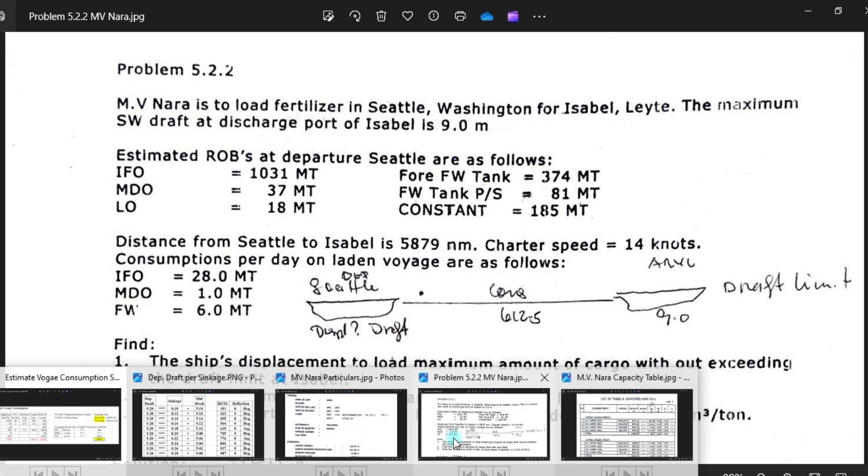The distance from Seattle to Isabel is 5,879 and the charter speed is 14 knots. So 5,879 divided by 14, which is the charter speed, you will get 421.21 hours, running hours. So with this 421.21 divided by 24 to get the number of steaming days is 17.55, which is here.

Steaming time is 17.5. So you have the steaming time, you have the consumption, so multiply 28 by 17.5 is 490. And 1 times 17.5 is 17.5, and 6 tons times 17.5 is 105. Total of 612.5, 612.5. So it is now confirmed.

Now, proceed to question: the ship's displacement to load maximum amount of cargo without exceeding the draft limit. So we will look at the displacement of saltwater upon arrival in Isabel. Find the maximum amount of cargo that she can load. So meaning, what is the maximum cargo to load?

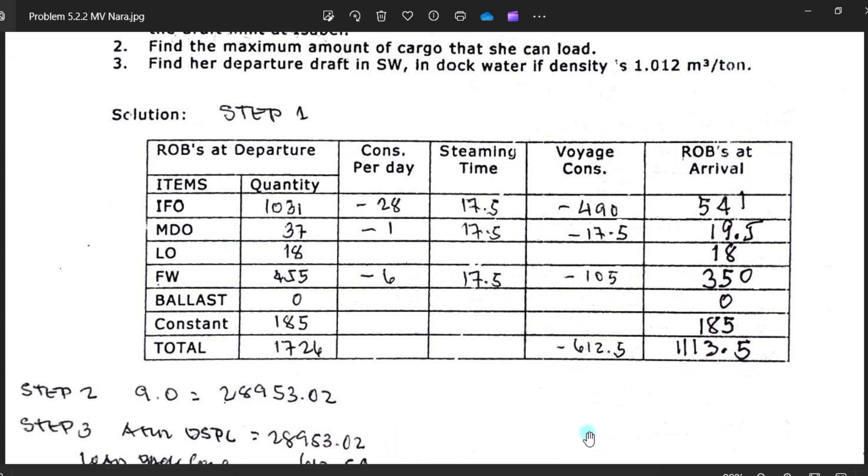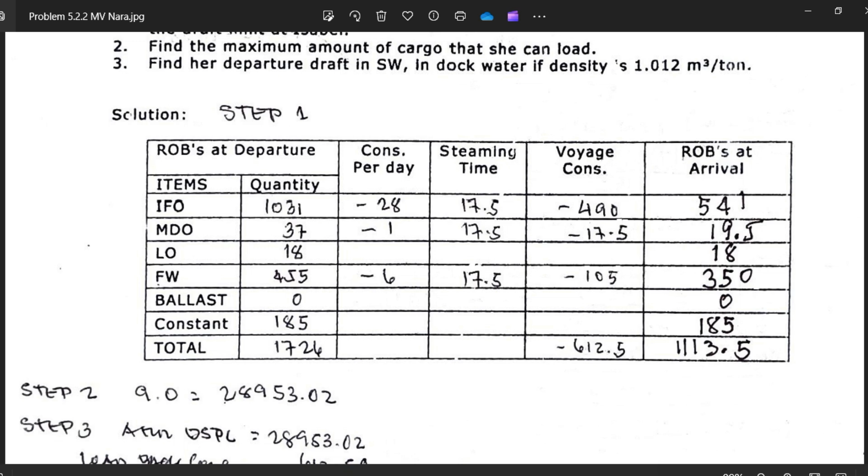So total quantity is 1726. I already showed you that one. 1726, and the total consumption is 612.5. ROB at arrival in Isabel is 1113.5. Okay, confirm.

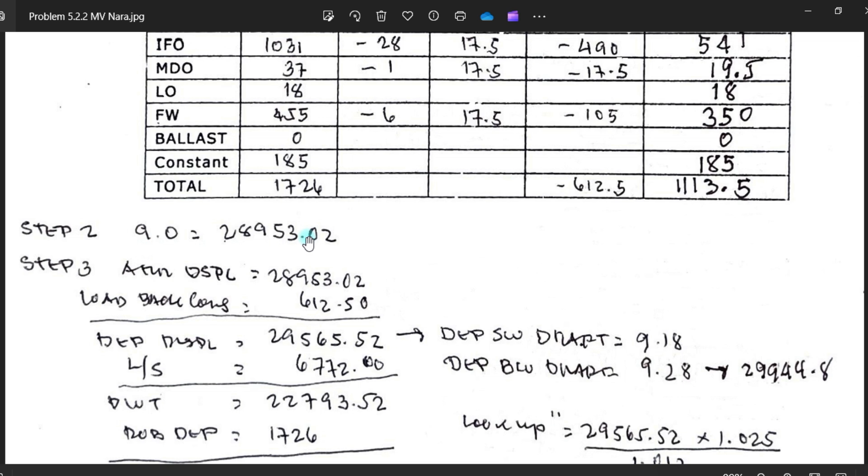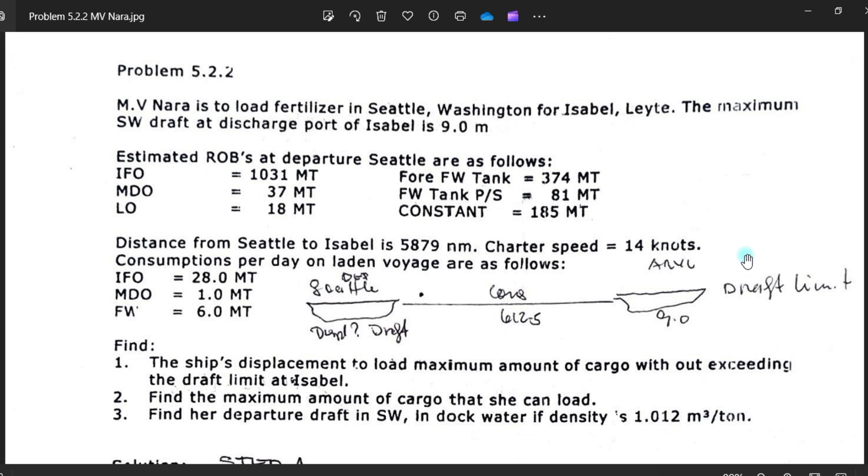Okay, next, step 2. What is the seawater displacement at 9 meters arrival in Isabel, of 9 meters? It says here 9 meters, discharge port of Isabel of 9 meters. So in saltwater, what is the displacement of saltwater of 9 meters in Isabel? So 9 meters is 28953.02.

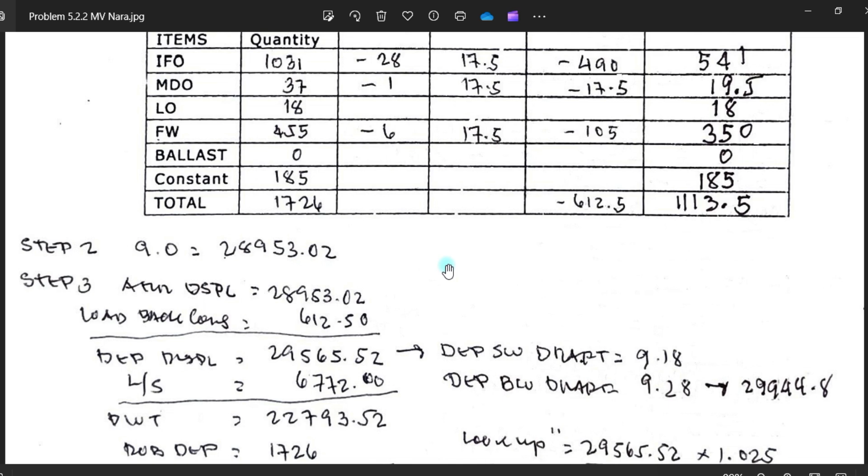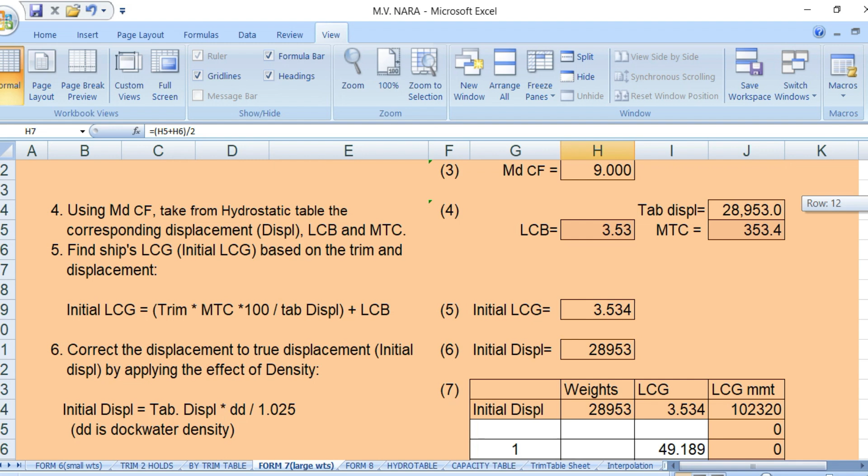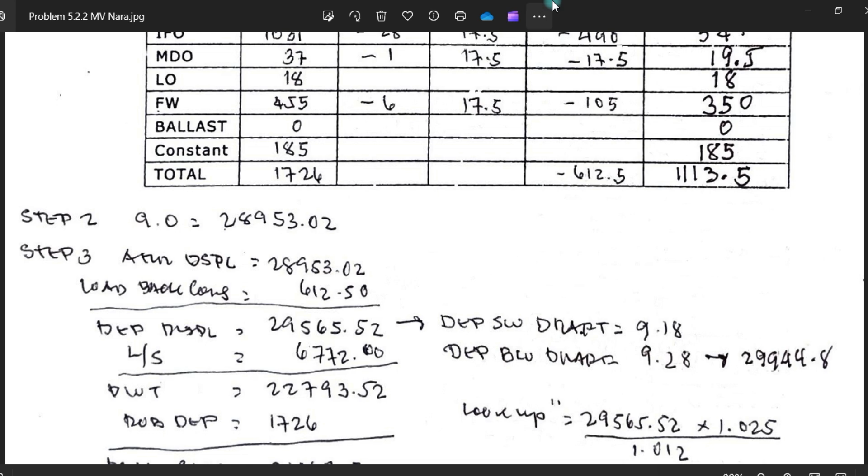So we go to the program, then with the saltwater 1.025, you put here upon arrival in Isabel of 9 meters. What will be his displacement in saltwater of 9 meters? His displacement is 28953, which is the displacement at this 9 meters.

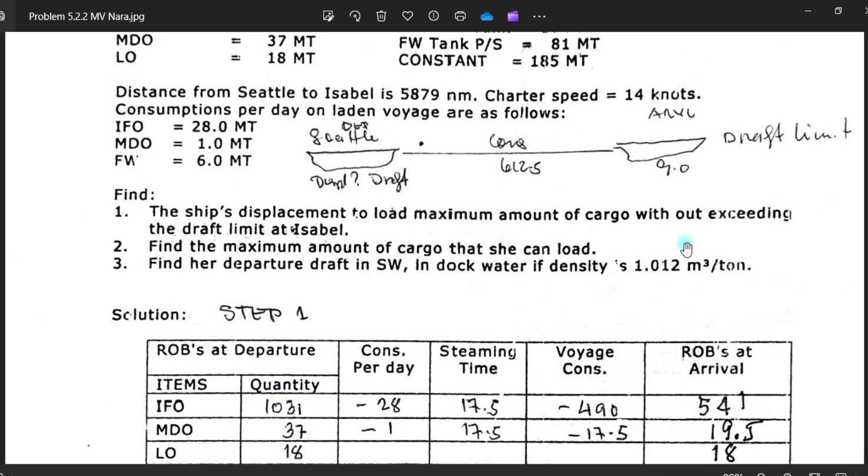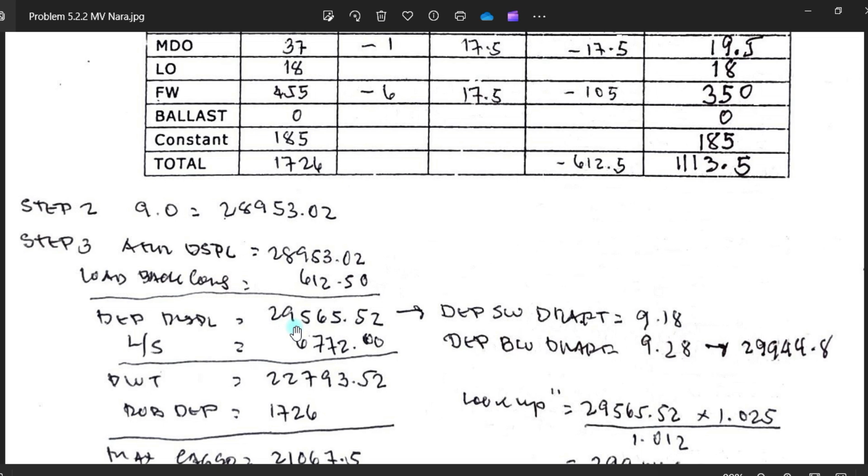So your arrival in Isabel is 9 meters. You have a consumption of 612.5 from Seattle to Isabel. So this figure of 612.5, you add to the displacement of your departure in Seattle, so you add the 612.5, so you will get a departure displacement of 29565.52. When you add 612.5 to the saltwater displacement of 9 meters, you will have a departure displacement of 29565.52.

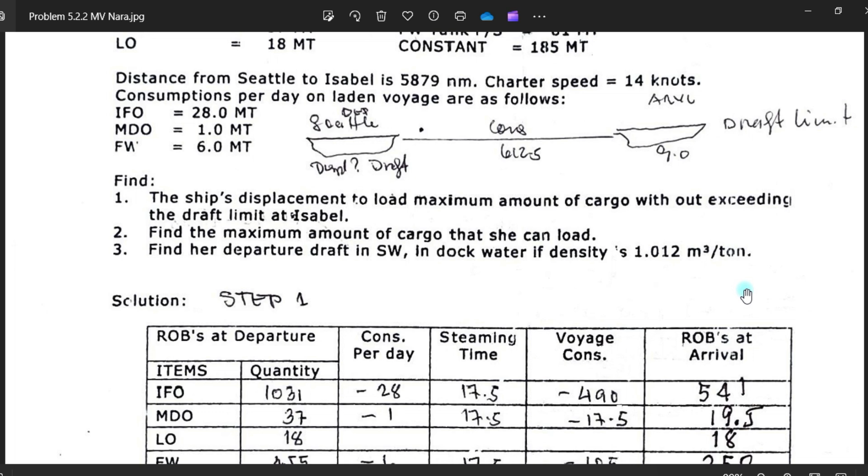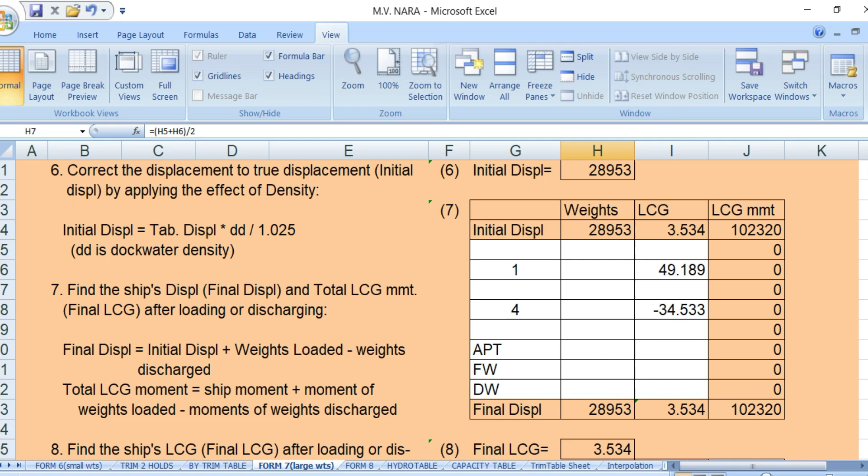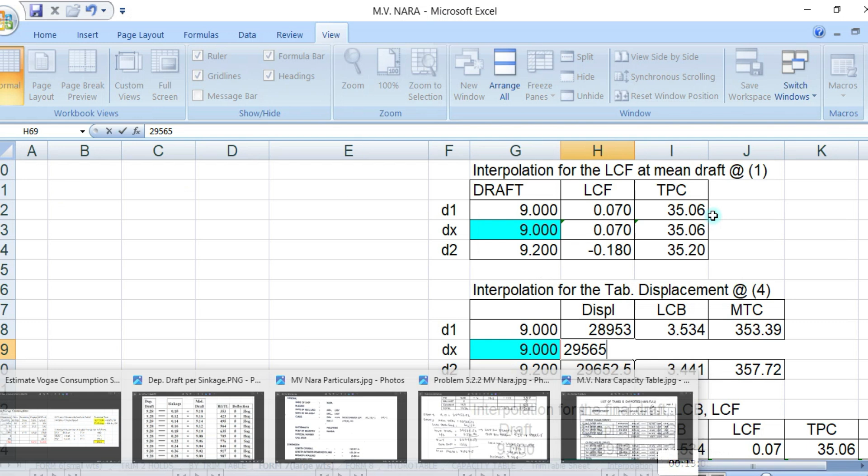What is this draft in seawater? So we take this 29565.52, put it here, 29565.52. What will be his saltwater draft? Check. Oh yeah, I'm sorry, that's not it.

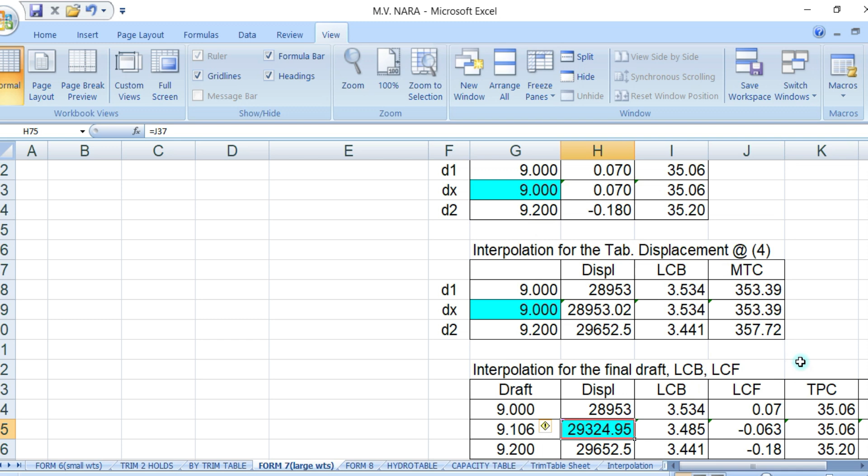Here, this one. What's that again? 29565. 29565.52.

This draft will be 9.175. Okay, so that will be this one, or 9.18. Okay, 9.18. So this one, 9.18 or 9.175.

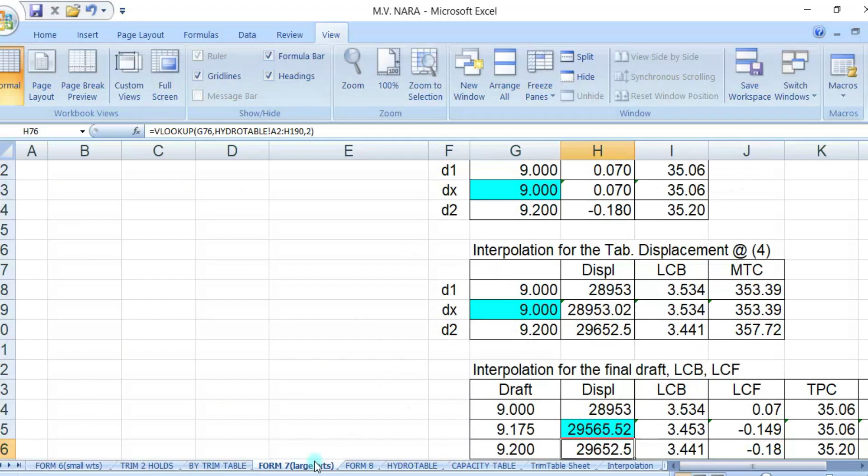Okay, so that is salt water. So we put the salt water here, 9.175. We go up, salt water 1.025 is 9.175.

So that is almost 9.18 meters. Okay, that will be salt water.

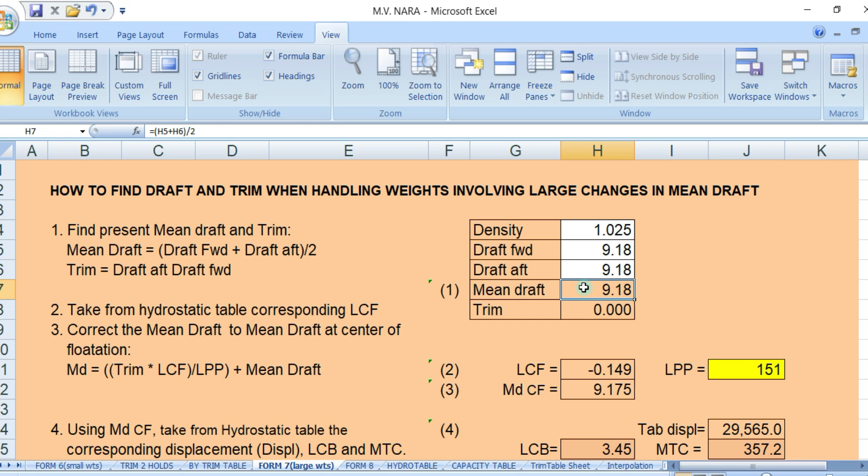What will be his displacement? His displacement will be 29565. Okay, 29565, 29565. Here, 29565. Okay, that will be his saltwater displacement.

What will be his departure brackish water displacement or draft? Okay, what will be his departure draft in brackish water of 1.012? So here, what will be his draft if he has a density of 1.012? What will be his departure draft in brackish water if the density is 1.012?

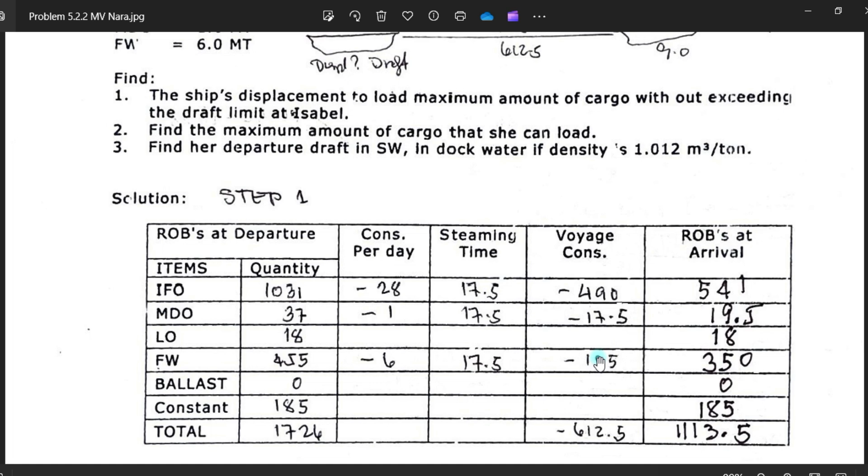Okay, let's check, guys. And we should have a value of 9.28. Okay, so that is 9.18. This is okay.

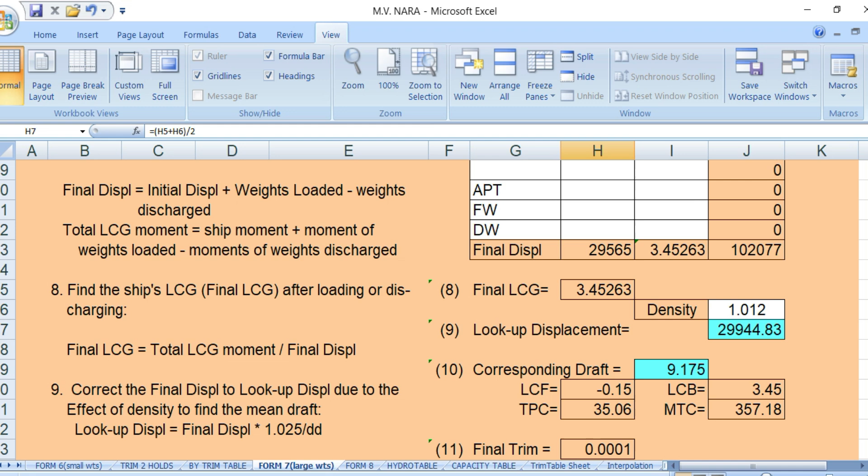Check the formula, guys. The formula says this displacement of seawater look-up, 29565 times your constant of 1.025 over 1.012. This is the local density. This is a constant of seawater. So remember this formula, guys.

Okay, so this displacement, or saltwater displacement, which is this one, we apply it here, guys. You click, so you click this one. This should be 29565.52, 29565. So this one, that will be

H33, times, says here formula, multiply by 1.025 over the local density of 1.012, times 1.025 according to the formula. So this displacement times 1.025 over the local density of 1.012, which is J36. Okay, then you press enter.

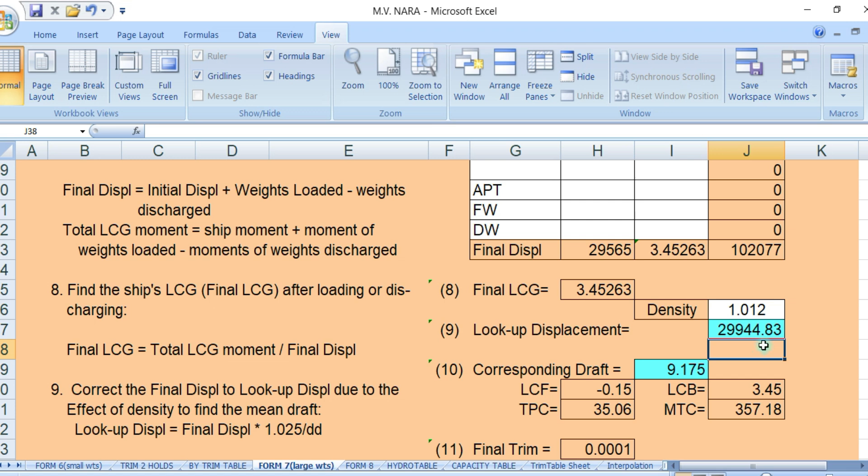So this will be the displacement in brackish water is 2994483. Check, guys. The displacement should be 29944.8. Okay, 29944.8. Check. 29944.83. Okay, what will be the corresponding draft of this one?

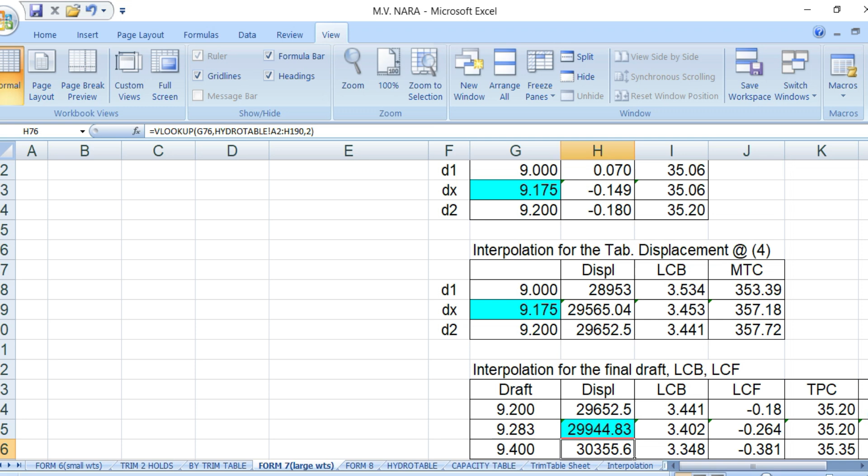Okay, let's go down. You put this equals, and you go up. Press this displacement and enter. So there he goes. 29944.83, and his corresponding draft will be 9.283. Okay, that will be the draft, and here you have the draft. Okay, 9.283. Okay, let's check.

So when you put this consumption value, you added it to your 9 meters, so this will be your departure displacement. Okay, so when this is consumed, you will arrive at 9 meters in Isabel, because this is already consumed. You have to take it out back, then you will arrive at 9 meters in Isabel.

Okay, so let's check, guys. That will be 9.28. Okay, that will be your departure in shuttle. Okay, let's use the program. So this will be your departure draft of 9.28. Okay, that will be your departure draft.

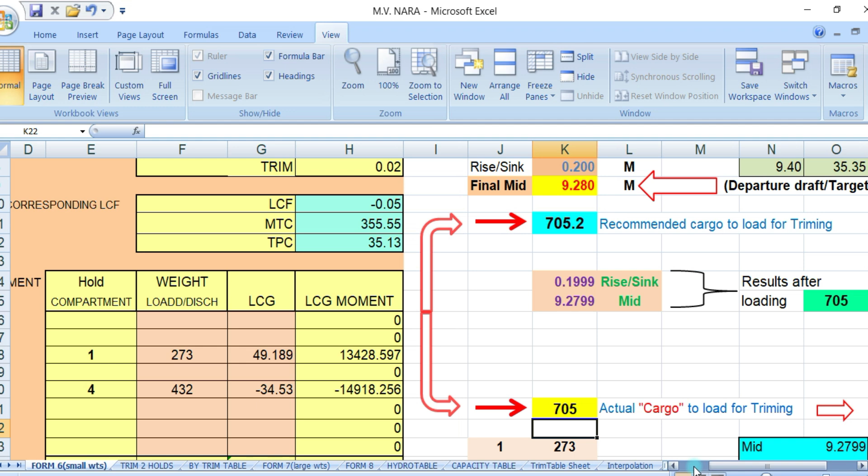So how to get this recommended cargo to load is your sinkage of 20 centimeters times 100 times your TPC, which is this one, and you will get the value of 705. Okay, so you go down, follow the arrow, then you put 705, and then it says here, go to trim two holds, which is this one.

Take note, the remaining cargo to load is 705. Let's say you want to depart on even keel, no trim. So what will be going to load in number 1? Because this is only for hatches. Number 1 is 273, so you load 273, 273, and number 4 would be 432.

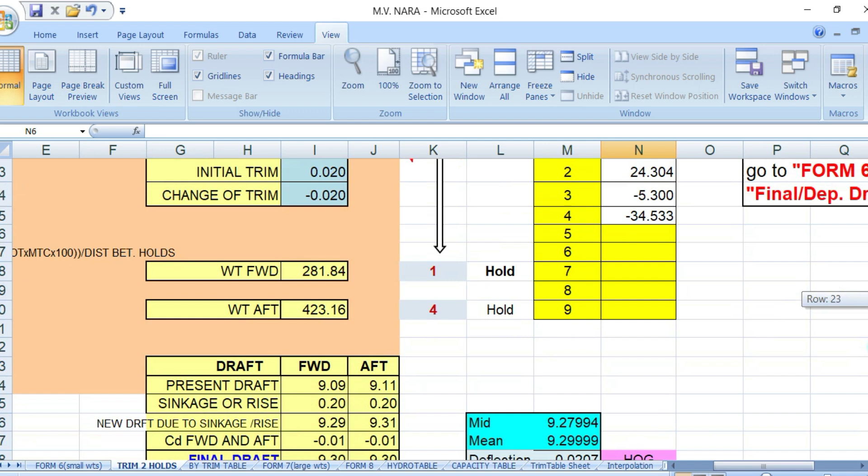And what will be your sailing draft? So you have even keel, but you have a hog of 2 centimeters. Okay.

Let's go on the other side to 705. How much you will hold in number 1? 282, and number 4, 423, total of 705 here. And what will be your sailing draft? Sailing drop will be even keel of 9.30 forward, 9.30 aft, no trim, mean is 9.30. Then you have a hog of 2 centimeters.

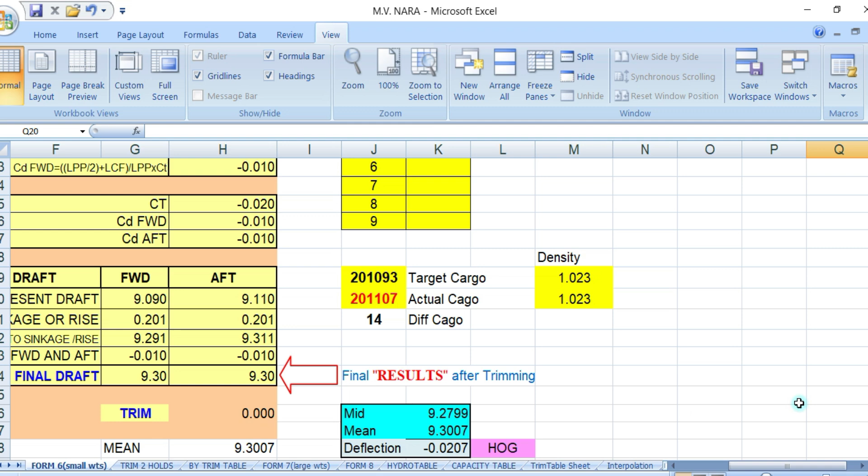How to take out this 2 centimeters hog? Okay, guys, now look here. This 20 centimeters sinkage, your midship draft should be 9.08.

Okay, and you will have a remaining cargo total of this 705, and you will have a zero deflection with the sailing draft of 9.28. Okay, so to get this zero deflection, we will adjust the forward and aft draft. Okay.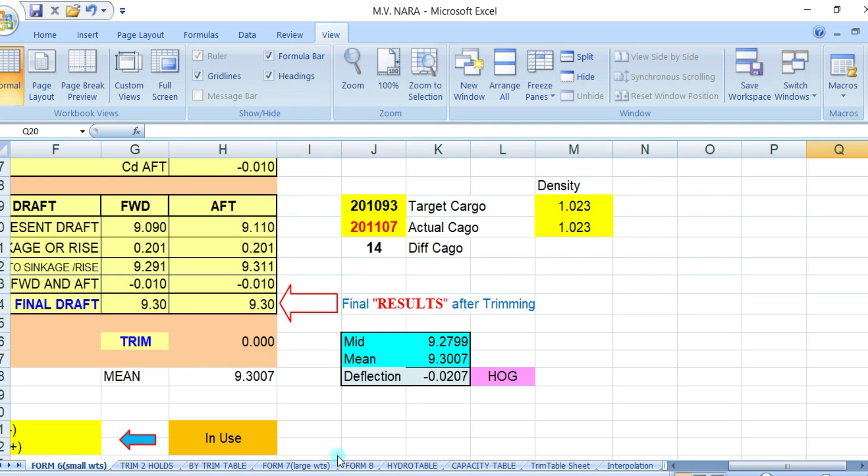So you go up, because your mid drop is 2 centimeters more than your mid. So if you put this like, forward will be 9.08 and your up drop is 9.08, then your mid drop is 9.08, okay? So, but your recommended cargo to load is still 705, okay? So, let's say we put here 705.

And you go to 2 holes, trim 2 holds, then you go up. You got here 705, 705, then you will have an even keel, trim, no trim, even keel, and your hole number 1 to load is, let's say 290. Put here 290, 290, and your hold number 4 will be 415, okay? 415. That's it. Okay.

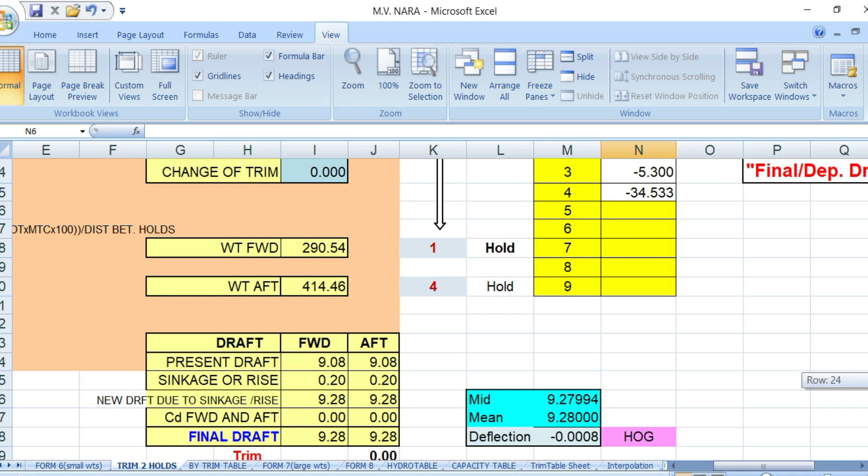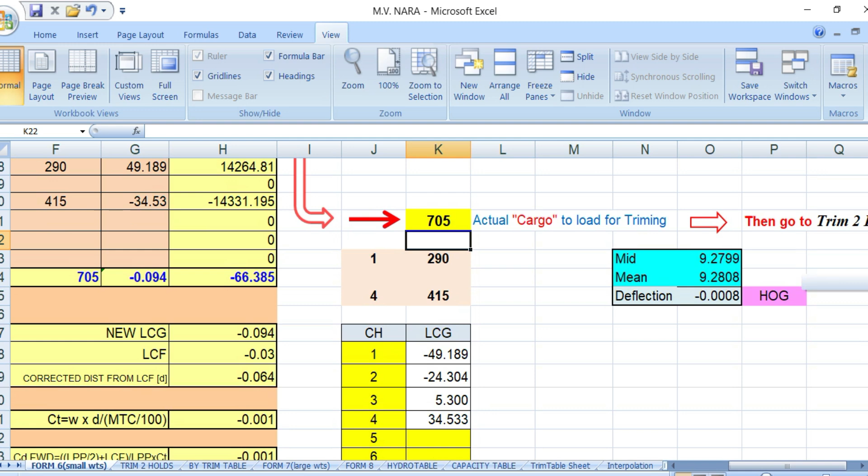Then your final drop forward will be the even keel of 9.28, 9.28, no trim, and your main is 9.28, and your deflection is 0. Okay? And we go on the other side, your drop forward is 9.28, your up drop is 9.28, you have no trim, and your main is 9.28, then you will have 0 deflection. Okay?

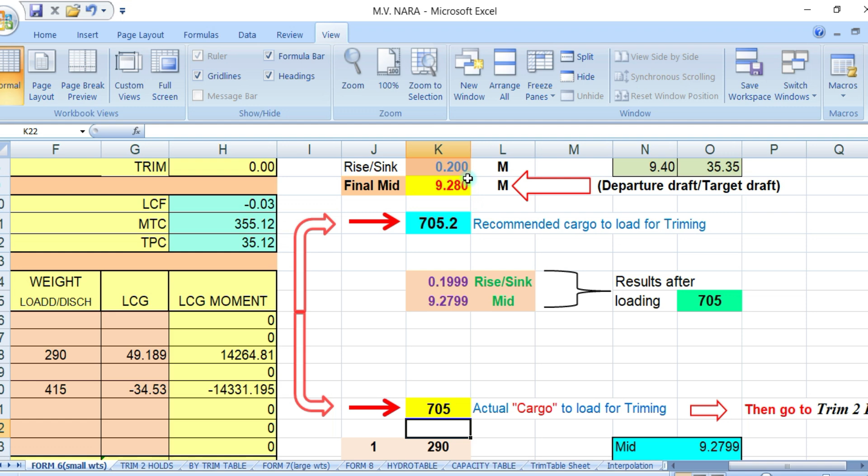Because look at here, when you load the 705, your mid drop is almost the same as 9.28, and your sinkage is almost the same as 0.20. Take note, guys, as much as possible, your forward and up drop should always be the same as your mid drop. Okay? Basing on this table that I made,

This is your departure drop, 9.28, and your mid drop, this is the sinkage. If your sinkage is 10 centimeters, your mid drop should be 9.18. If your sinkage is 18 centimeters, your mid drop should be 9.10. Since our mid drop is 20 centimeters, so your mid drop should be 9.08.

Then your remaining cargo to load will be 705, and you have a 0 deflection. That is what happened here. So when I made the midship, we made a reading of mid port of 9.06 and starboard 9.10.

You have mid drop of 9.08. Okay. So, and your sinkage is 20, which is this one. Okay. Your sinkage is 20, your mid drop is 9.08, and your recommended cargo to load is 705. Okay?

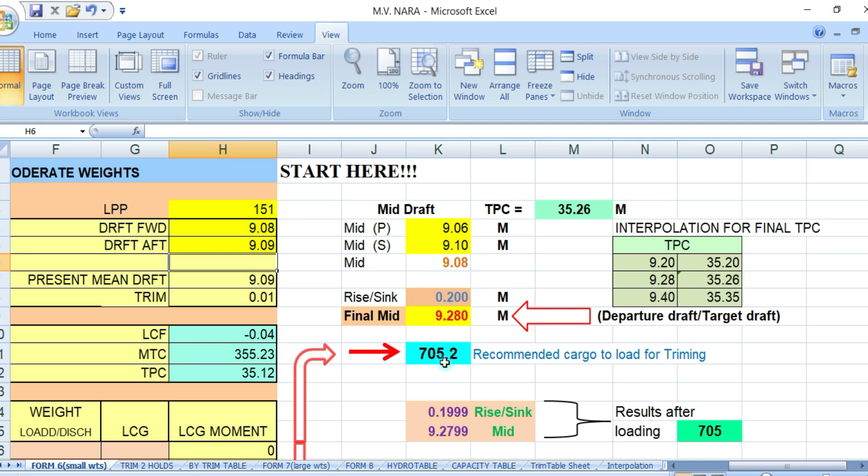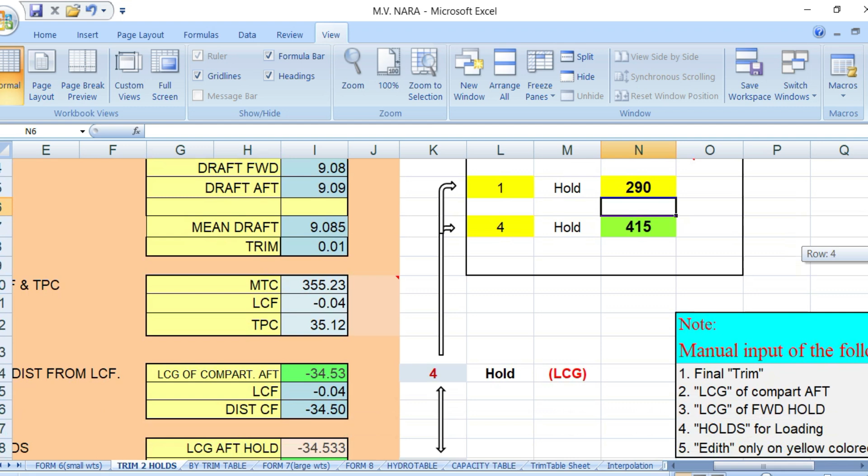So his recommended cargo is still 705. And we put here 705, 705, and we go to trim 2 holds here, 705, what is he recommended to load in hold number 1? 286. 286. So you should load in hold number 1 is 286.

See? Look at the change, guys. With a small change in your drop forward. So he says here 286. 286. And up will be forward. Number 4 will be 419. Here, 419. And what will be your final drop?

Departure drop. See? It's now 9.29, 9.28, and your trim is nil, and your main is 9.28, but it's still zero deflection. The remaining cargo to load is 705,

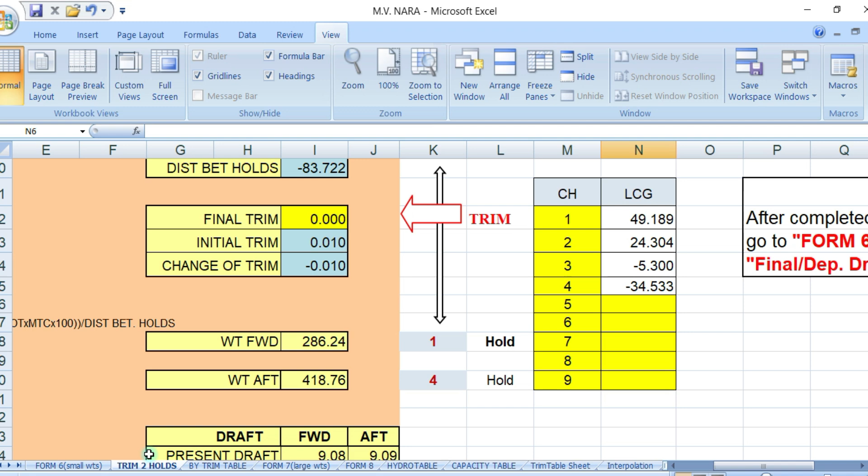And this one also is 705 or 705, and we have no trim. How much shall we load in hold number 1? 286. So number 1 is 286. Number 4 is 419. 419, and the final drop is forward 9.29, up 9.28, trim is 0, main is 9.285, and you have a 0 deflection.

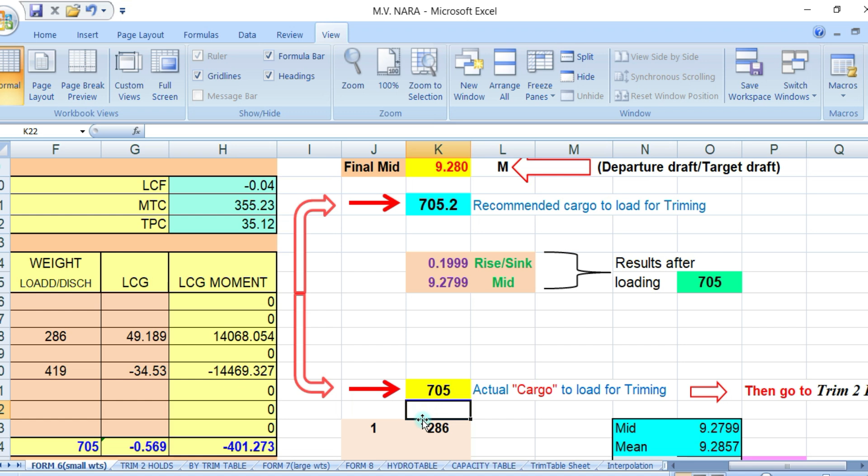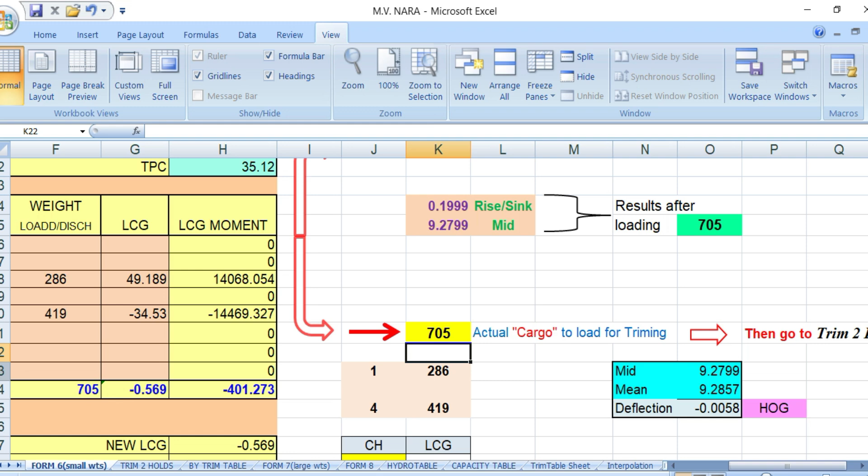The other side, we load 705. Number 1 is 286. 286 here. 286. Number 4 is 419, and

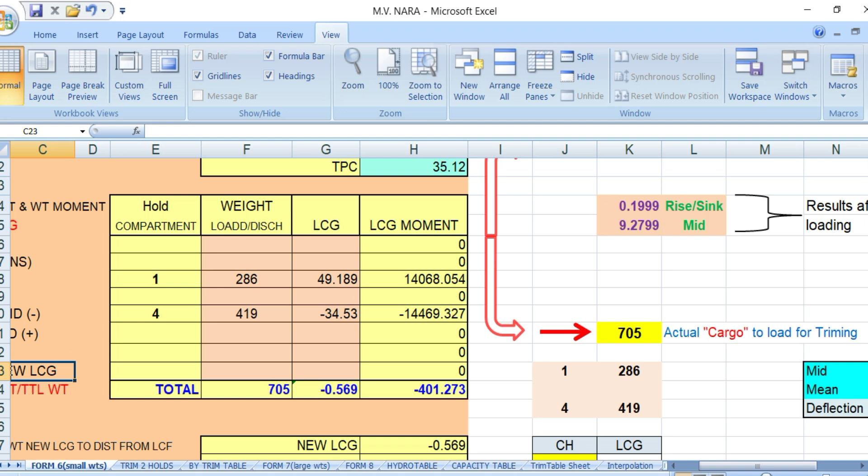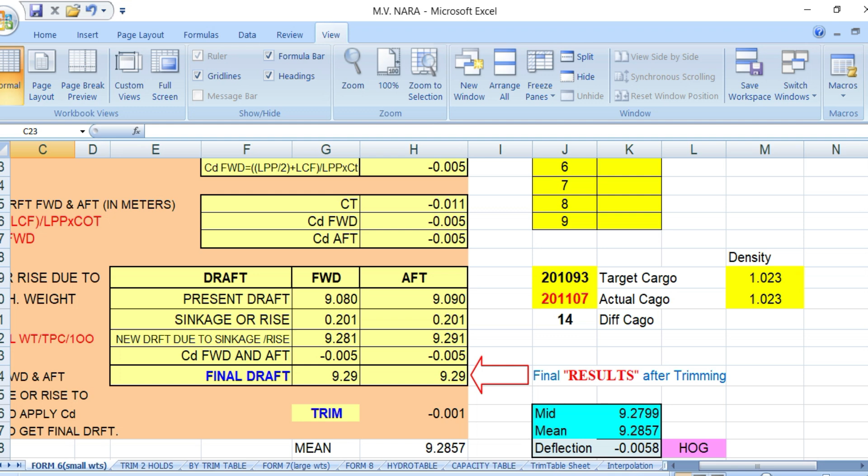Final draft is forward 9.29, aft is 9.29, no trim, and the mean is 9.2857, and we have 0 deflection. Okay, so

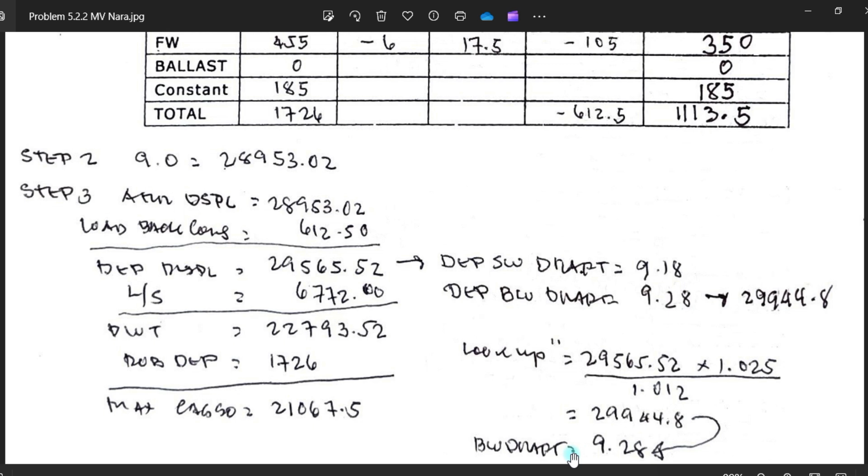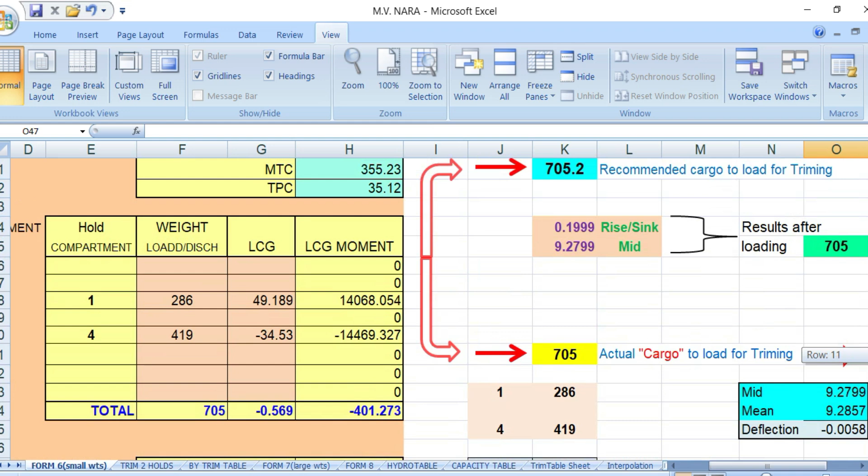That's it, guys. The brackish water departure is 9.28. So number 1, 9.28. Here, 9.28, and we have a 0. As much as possible, your mid draft should be close as much as your mean draft. Okay, almost even keel. Okay, well, it all depends on the loading sequence which you have.

So that's it, guys. Let me see still what we have here. Sorry, this is, oh, I'm sorry.

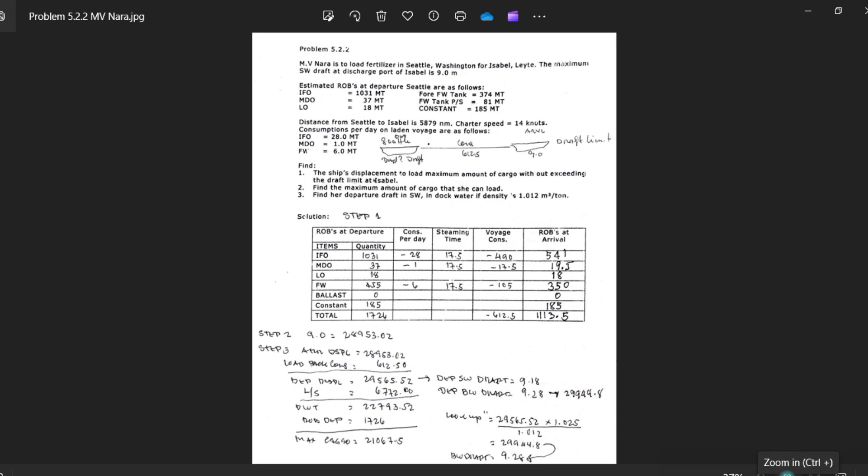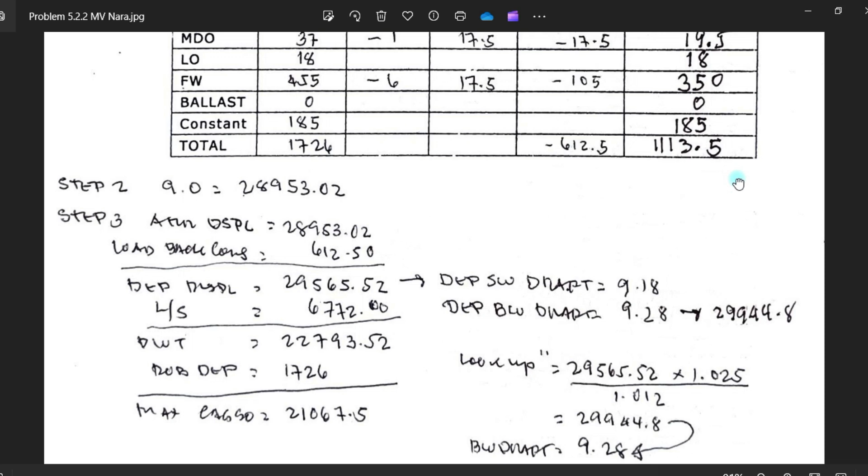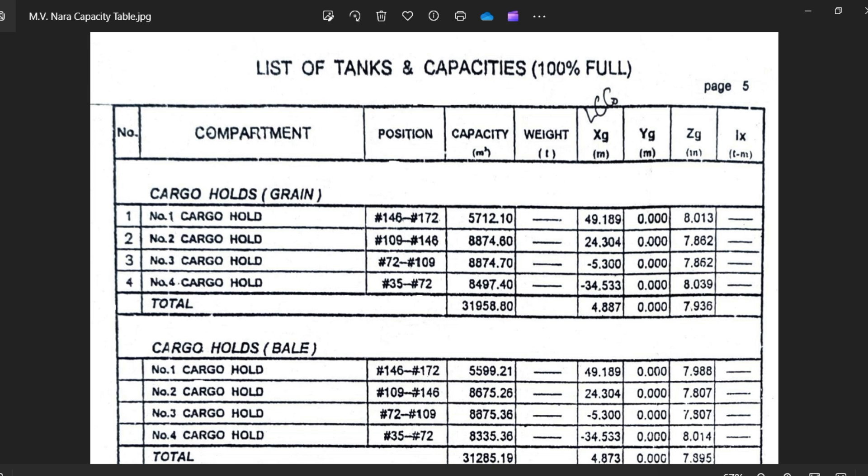Okay, this is the capacity tables. The vessel has only 4 holds, 1 to 4. Okay, and this is the ship's particular.

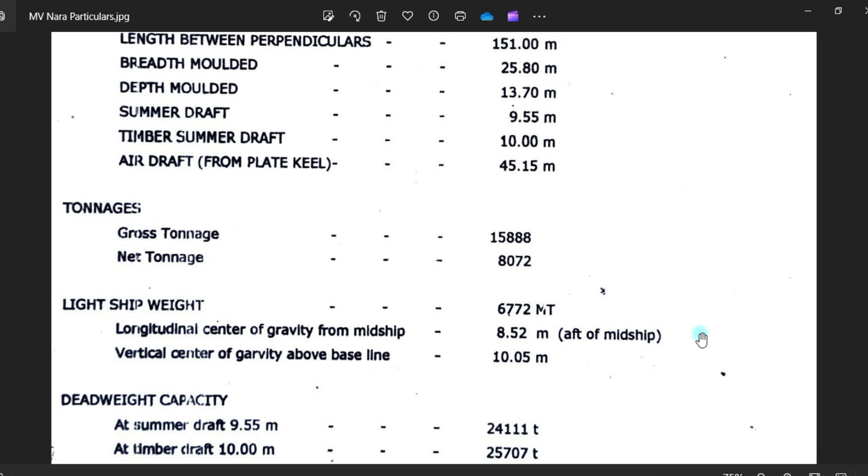Gross tonnage is 15,888, and net tonnage is 8,072. Light ship is 6,772. Okay, and that's it, guys.

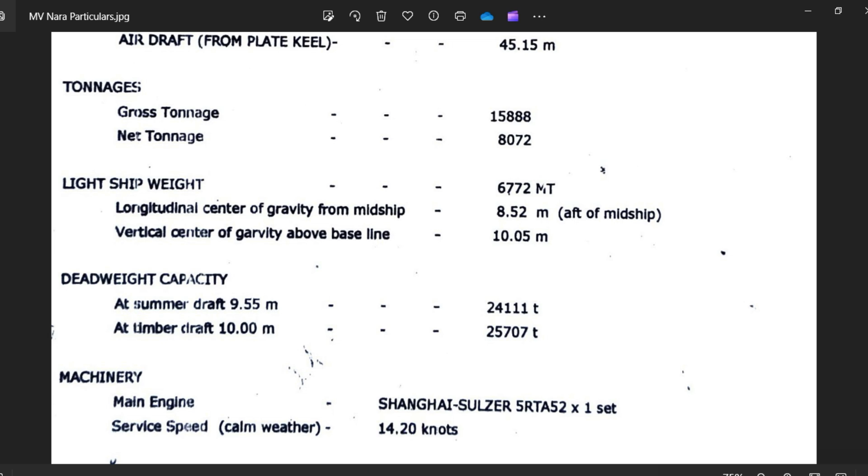What more? This one table which I made. This will be your departure draft.

If your sinkage is 10 centimeters and your mid draft is 9.18, so your remaining cargo to load should be 353 and you have a zero deflection.

So let's try this one, guys. 9.18 is your mid draft. Okay, mid draft is 9.18. Okay, so your sinkage is 10.

So your sinkage is 10. Okay, and your remaining cargo to load should be 353. Okay, let's go back.

And this is 9.18. Put this to, let's say, even keel. 9.18. Okay, so your recommended cargo to load is 353, which is this one. 353. Okay, so let's proceed.

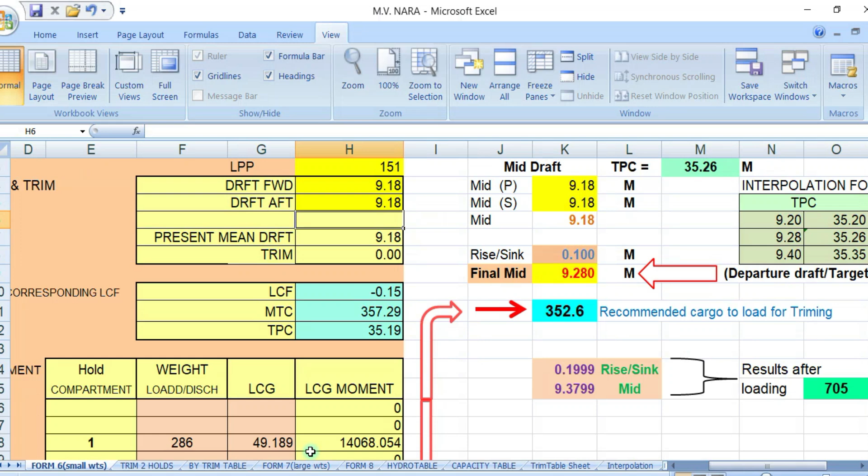Go down. Put 353. Okay, 353. Once you load 353, you will have a departure draft of 9.28 and your sinkage is 10 exactly. Okay, then you go to,

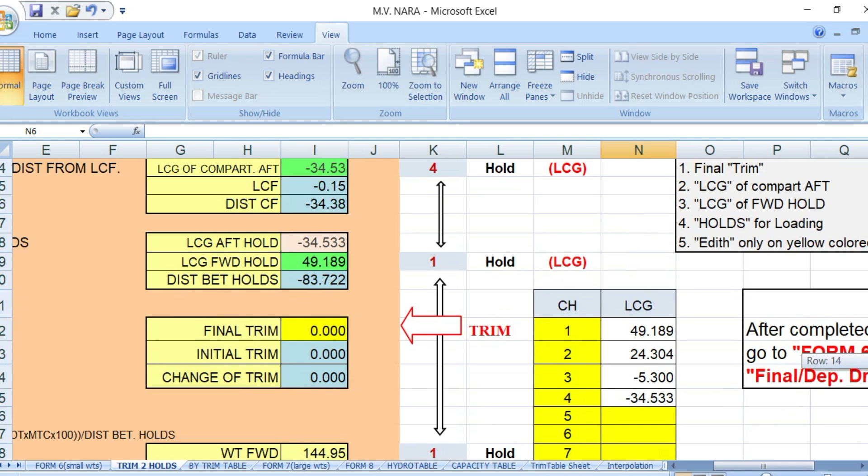you get a 353. How much would you load in number one? If you say no trim, 145 in number one, and 4 is 208. Okay, 208. And what is your departure draft? It's 9.28. We have a zero deflection.

Okay, so let's go on the other one. Let's say you have a sinkage of 18. That will be your midship will be 9.10 and your remaining cargo to load is 635. So we put 9.10 your midship draft.

Okay, how much? 18, no? 18. 9.10. Then you go here. So your, I'm sorry.

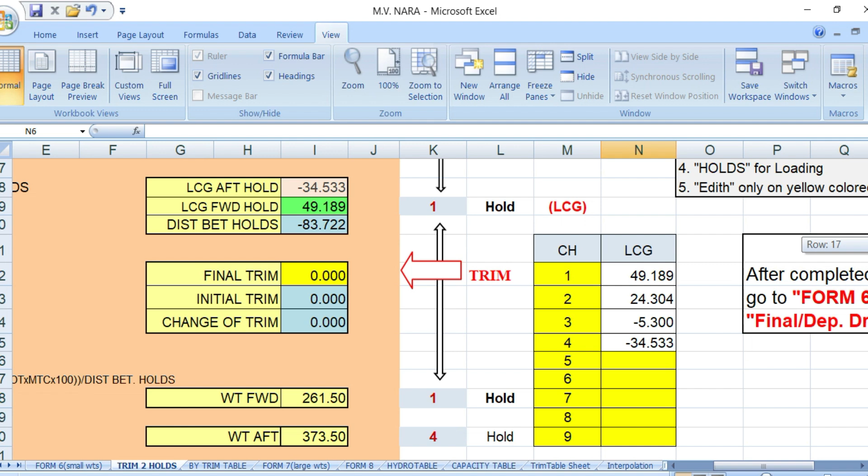How much would you load in hold number 1? 635. How much will you load in hold number 1? No trim. Number 1 is, we say, 262. And number 4 will be 373. Okay, 373. And your draft will be 9.28, no trim, mean is 9.28, you have a zero deflection.

Okay, and the last one would be, let's say, we'll take this one. Sinkage is 26, so 9.02, okay? And your sinkage will be 26, and your remaining cargo to load will be 917. So let's say 9.02.

Number 1. Your midship is 9.02. Let's say even keel. 9.02. Okay. So your remaining cargo to load is 917. Check. Your sinkage is 26, and your remaining cargo is 917, and that will be zero deflection.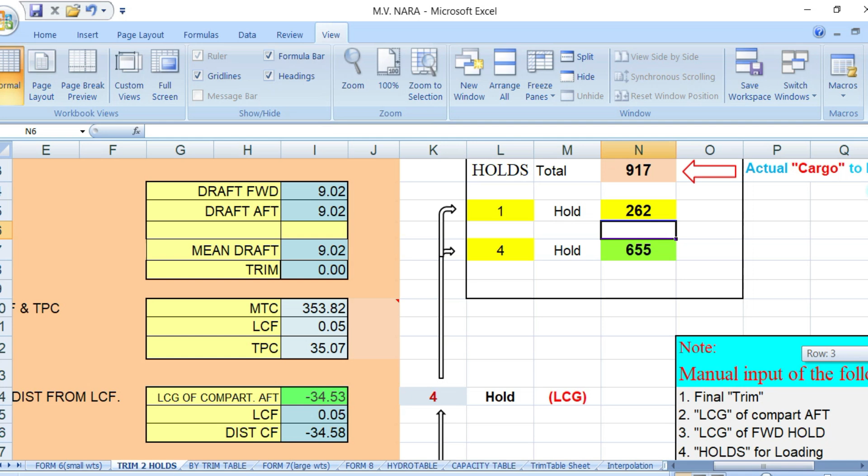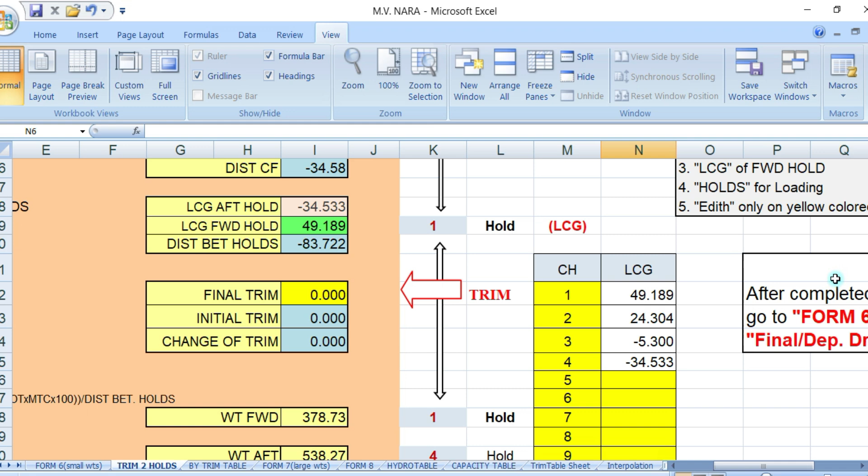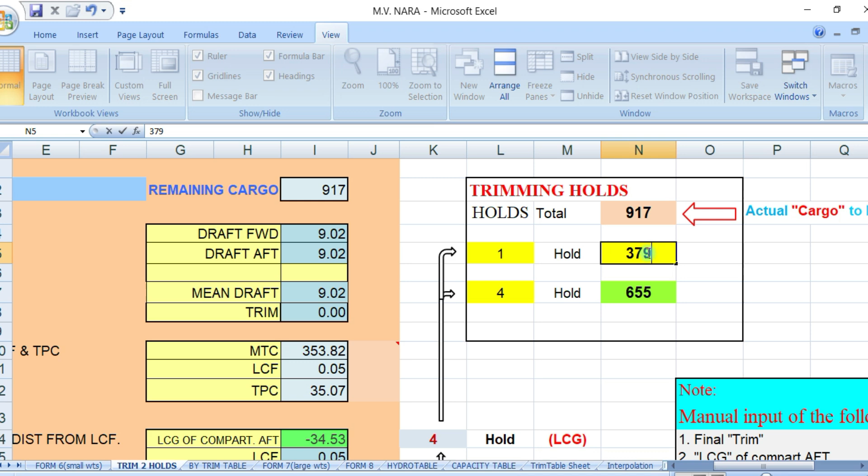And what will be in hold number 1? Say here 917, hold number 1, no trim. Hold number 1 is 379. Okay, 379. And number 4 will be 538. Okay, 538, and the final draft is 9.28. Forward and aft, no trim, mean is 9.28, and you have a zero deflection.

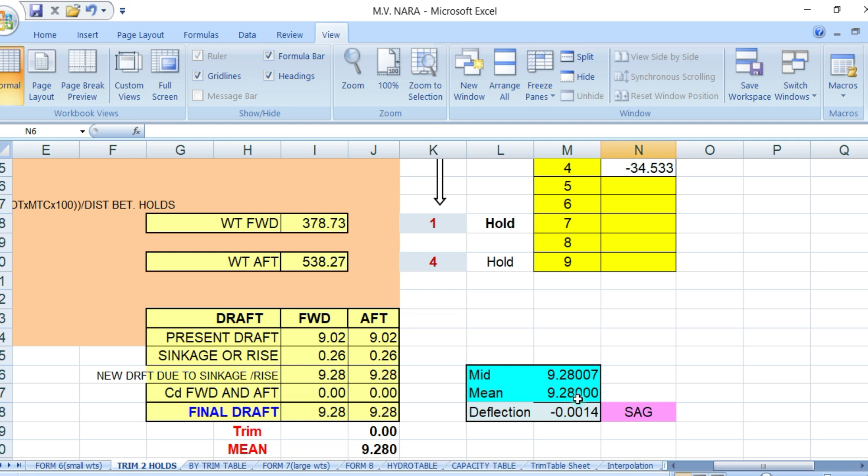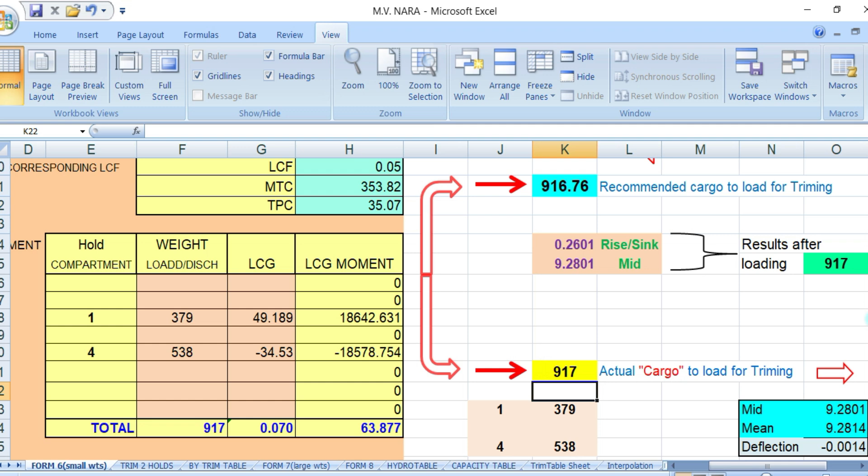Okay, the other side, 917, and number 1 is 379. Number 4 is 538, total of 917. And your final draft is 9.28 forward, 9.28 aft, zero trim, and your mean is 9.28. You have a zero deflection.

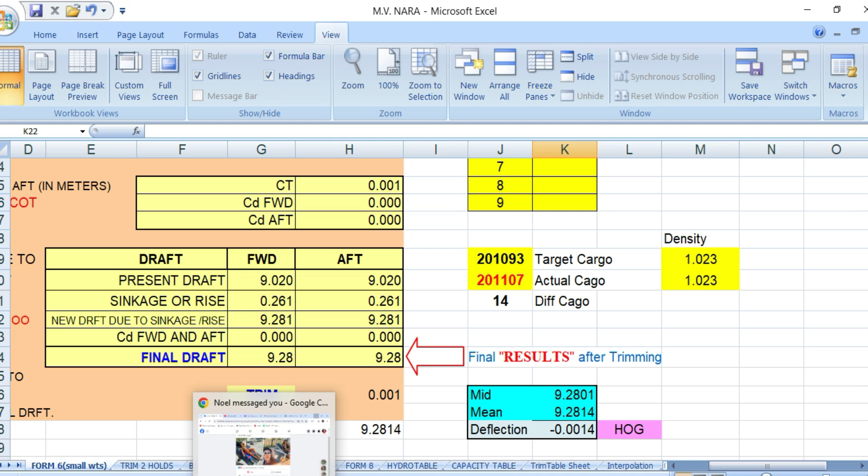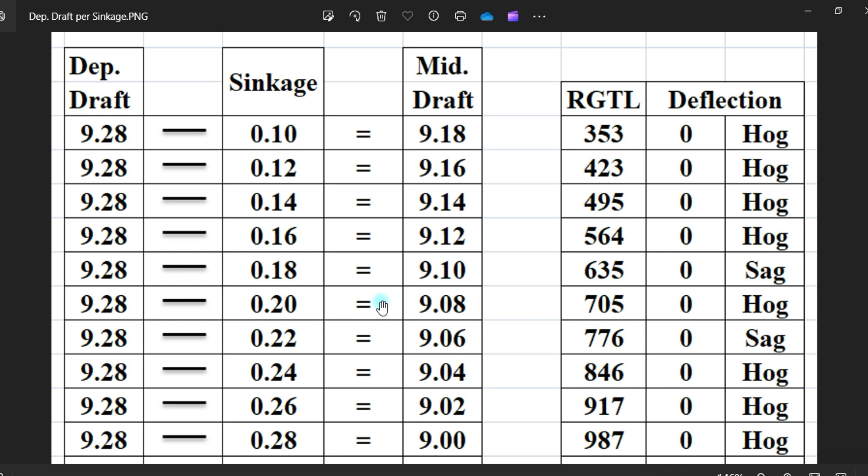So guys, you will just follow this guidance, and you will have a zero deflection. Okay, you don't need to make this one, but this is my own personal use, just to guide me. Okay, so

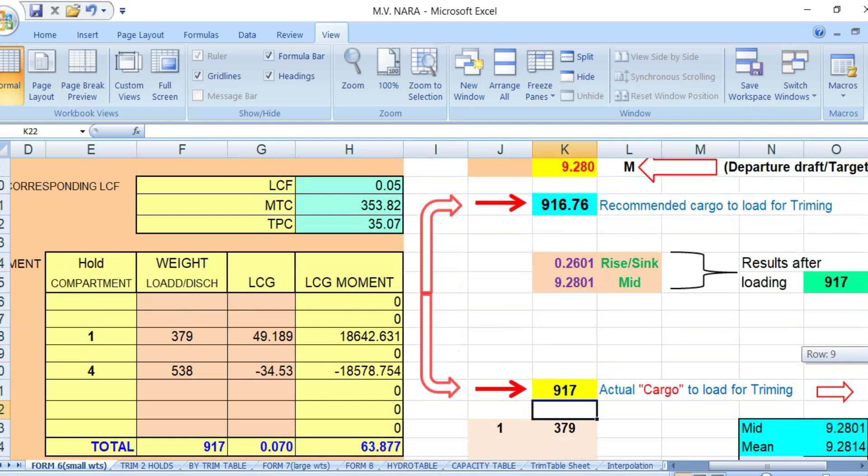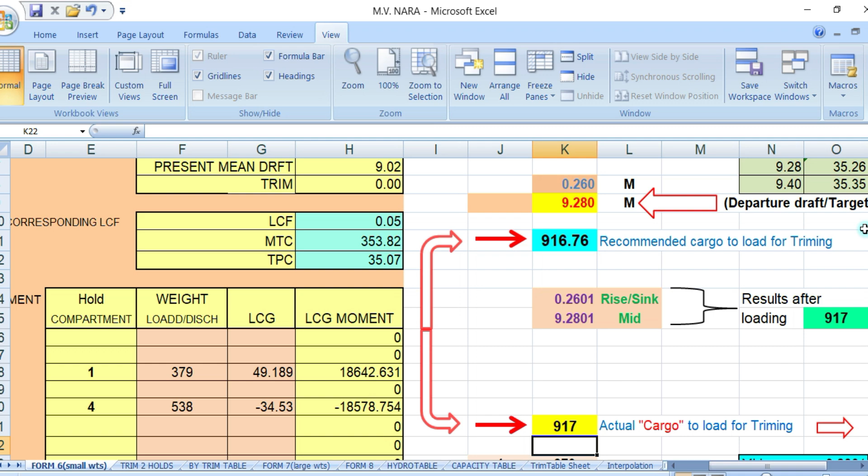that's it, guys. Bear in mind that the important is the sailing draft. Once you load this cargo remaining on board, if you load this one 917, which is the recommended cargo to load, you should get this mid draft of 9.28, which is the same as this one, and your sinkage is 0.26, which is the same as this one. Once you get almost the same figures, then for sure you will have a zero deflection. That is if you have the same draft forward and aft and midship, port and starboard. So then for sure you will have a zero deflection.